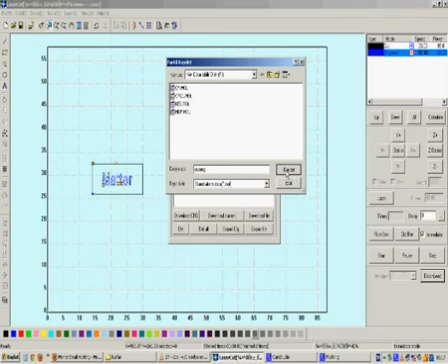If you click on export file, then you will export the cutting and engraving file, namely this rectangle cutting and the script engraving, to the flash memory. Let us give cut eng the name, and when we click on save, its extension is also MOL.

Doing so, we exported the file to the flash memory, and now we can load those files, both the cutting and engraving file and the configuration file, to the laser cutting machine by the flash memory. There is one more important point in here.

When you load the configuration file with the flash memory to your machine, you will see the file name that we have given, CFG1, on your touchpad and LCD screen file name part, and you will select that configuration file name CFG1 and then press start on the touchpad to activate this configuration file.

Remember, when we did download, it was running itself, but you have to run this configuration file if you exported it by the flash memory. If you do not, then your new configuration file will just be loaded to your machine but will not be activated. This is the difference between downloading configuration and exporting configuration.

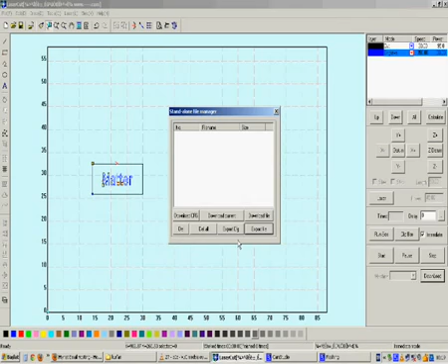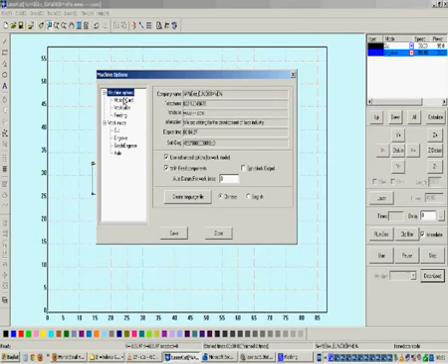On the file menu, there is machine options part. If you click on machine options, you will have this screen. You will have two titles. One is machine options, the other is work mode. Let us move on one by one. In machine options, there is motion card. This is the configuration file about your machine's main board.

For example, if your machine is using Leetro MPC 6515, then the settings of that board will be shown in this menu. The second one, the most important one, which we will use and change the parameters of, is the work table. In the work table, there are so many parameters that we can play around with.

The first one and the most important, the most used one, is the range, x-axis range and y-axis range. With different machines, you have to change this range. For example, if your machine is 90 centimeters times 60 centimeters, that means 900 millimeters x-axis range and 600 millimeters y-axis range, then you have to input those x and y axis values in here. If you are using the software with another, bigger machine, then you will input those values in here.

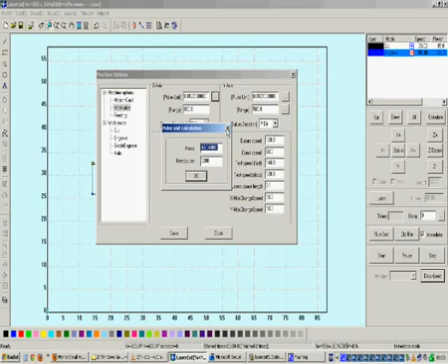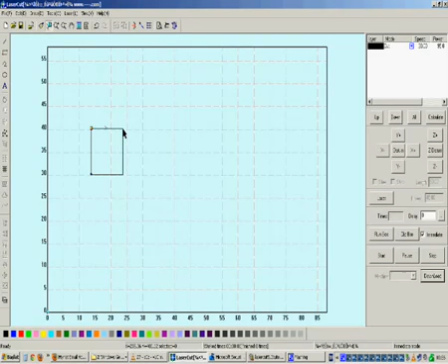This move value is obtained after some tries. How do we do this? Let me give an example. First, you draw a rectangle, for example, and let us size it as 100 millimeters times 100 millimeters. Now it is a square, 100 by 100. And when we cut this one, the cut result will be measured by a compass to make a precise measurement.

If your rectangle cut from your material is not the same as 100 millimeters times 100 millimeters, then the pulse unit and the move value in the work table menu will be changed. For example, if you got 110 millimeters instead of 100 millimeters in the x-axis direction, then try to set the move value in such a way that you will get exactly 100 millimeters on the cut results.

But there is of course a mathematical way to do this, by simply taking the existing value, that is 110 millimeters, and dividing it by the value that we want to obtain, that is 100. The ratio is 1.1. If it is 1.1 times bigger, then either by dividing this move value by 1.1 or multiplying it by 1.1, you get a new move value, and check whether with the new move value you get just 100 mm side length. With either one of these, you will get the 100 mm side length exactly.

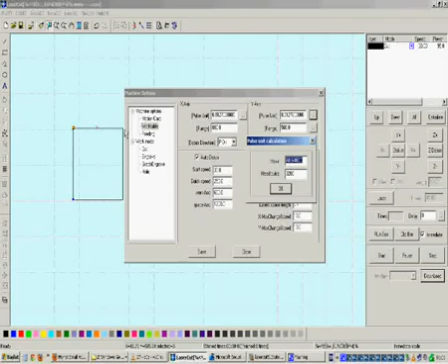To obtain a healthy working condition of the machine, it is better to have the same need pulse on both step motor drives by making the switch settings the same, and then using the same move values to obtain exact length measurement results.